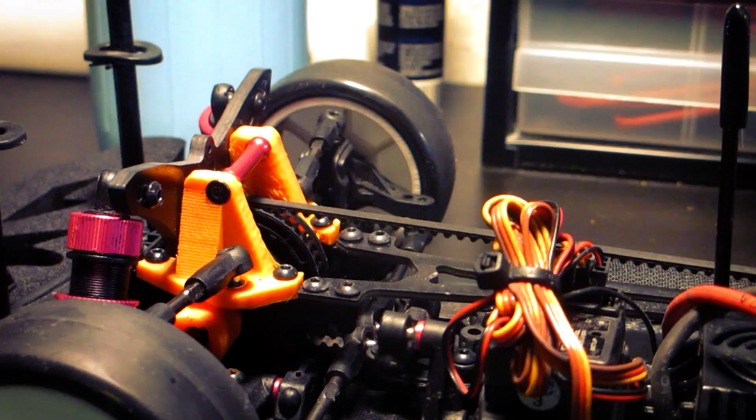I've been using 3D printed spare parts on my on-road sedans for a while now, so I know how they should be designed to make them work.

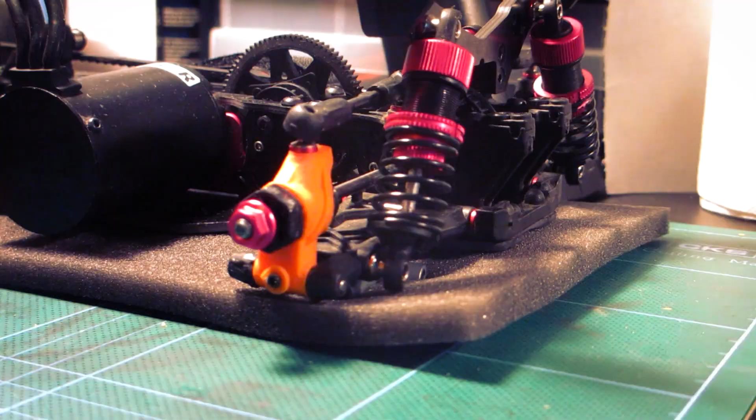I've found that it's very easy to make working parts for the car chassis—parts that don't move very much, like the parts in the steering, suspension arms, things like that. That is easy.

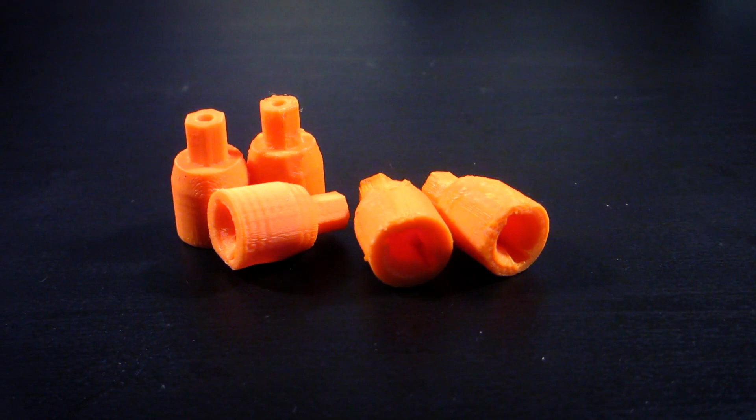The hard part comes when you try to make parts for the car's drivetrain. These parts will be moving very fast, and it really increases the amount of stress put on the part.

While designing these spare parts, I've made a bunch of prototypes, and they really taught me what to look out for when designing these parts.

The orientation you decide to print your part in plays the biggest role in the strength of your RC spare part. That's because the adhesion between the layers is the weakest part in a 3D print.

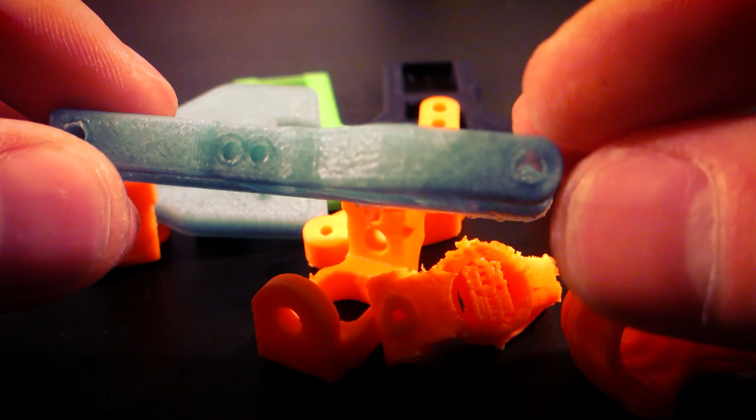This first part has been printed with the layers vertically going down the part, and as you can see, I'm able to break it pretty easily. Keep in mind this has only been printed at around 20% infill.

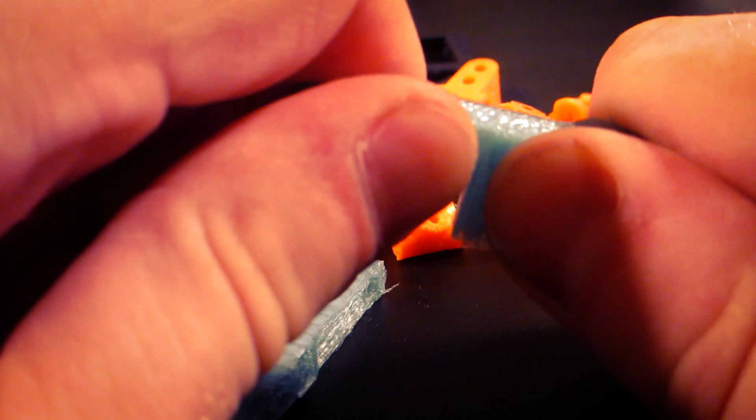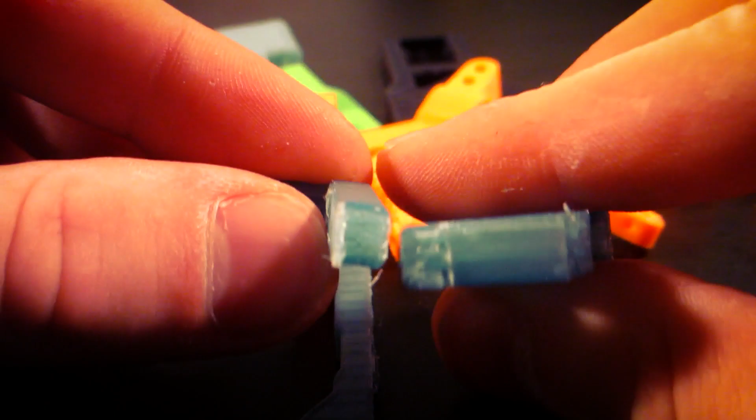The reason this breaks so easily is because the cross section between the layers is very small, decreasing the layer adhesion. This next prototype has been printed laying flat.

This has increased the total layer adhesion by a lot and made the part much tougher. I'm still able to break it, but it was much harder to do.

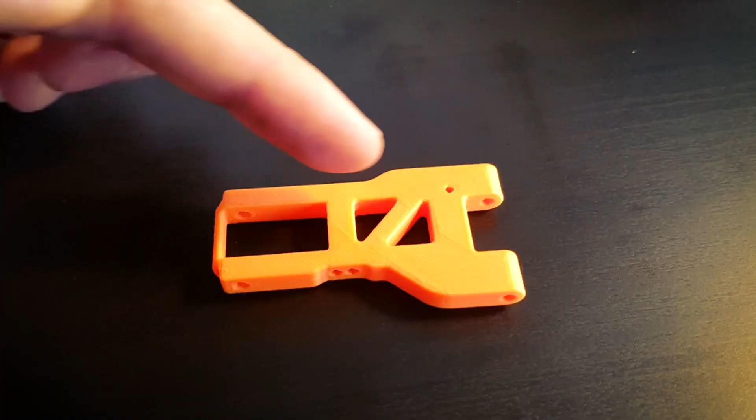This part has been printed laying flat, meaning it's super strong in two directions, and that's exactly what you want from this part. Although there is one issue.

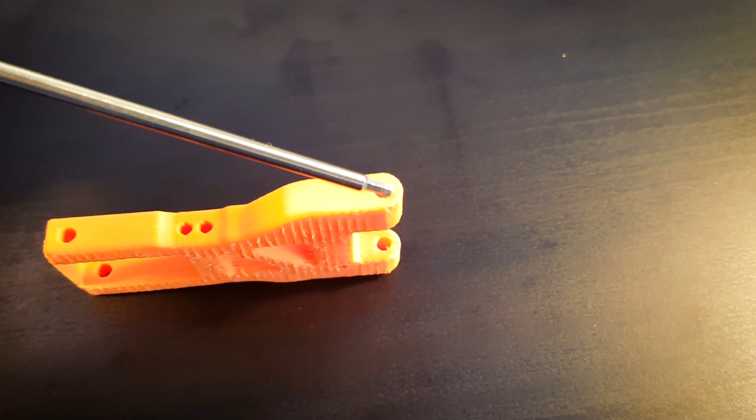Because it was printed laying flat, the holes near the end are suffering. The side walls are only held together by the layer adhesion, which isn't very strong.

The solution is to print the part at an angle. That way you increase the strength near the hole at the end by compromising the strength in other areas.

This will work because before, the part was really overkill in one direction, but very weak in other directions. This way we even out the strength.

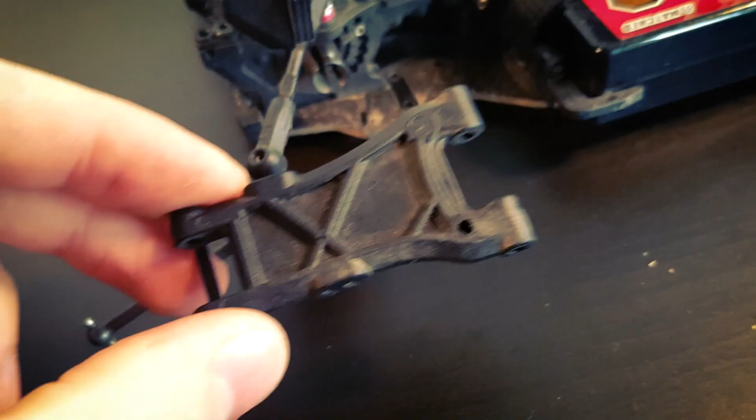Now it's time to start designing our own parts. I pulled off the rear suspension arm from my on-road sedan, and this is the part we'll be designing and printing today. Start off by using a caliper to gather all the critical measurements.

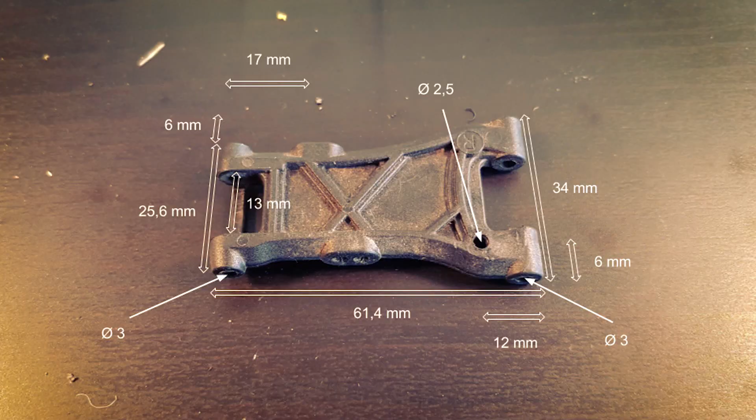These measurements will be my guidelines when I go into Fusion 360 to model this part. I start by sketching a rectangle with the outer dimensions, then I use lines to cut into that rectangle, shaping the part.

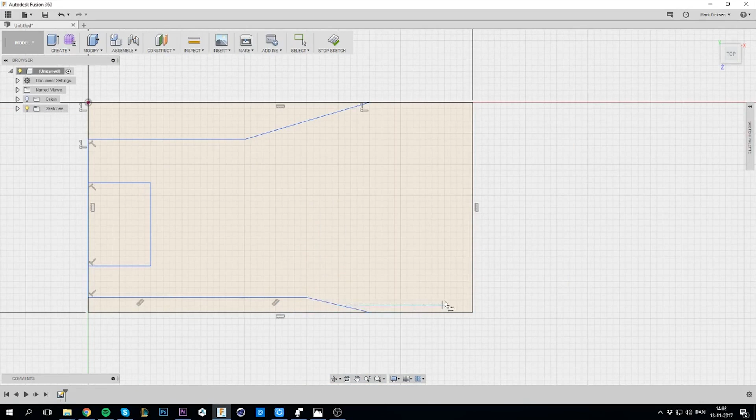I can now extrude the part upwards, giving it thickness. I then create another sketch from the side that I use to cut out the front profile.

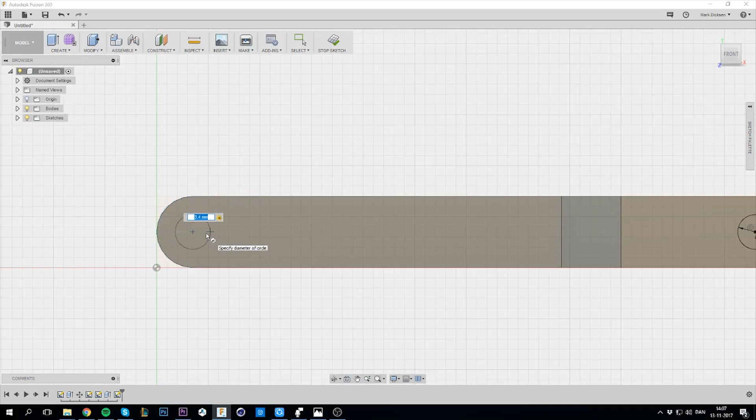I'm now cutting out the holes, intentionally over-dimensioning them by about 0.4 millimeters because I know my printer will print the holes about 0.4 millimeters smaller. Now a bit of chamfer to make it the best.

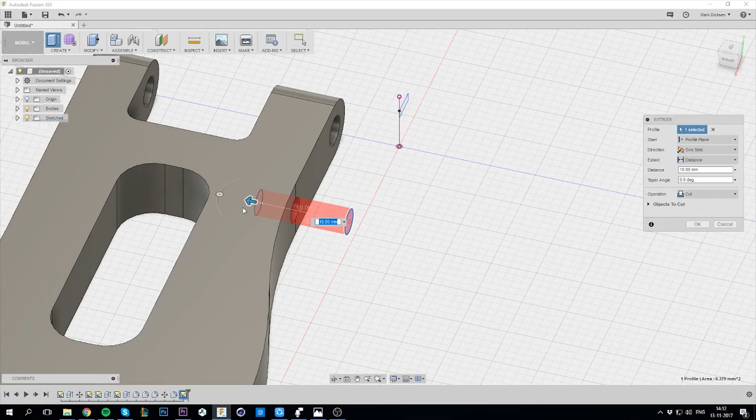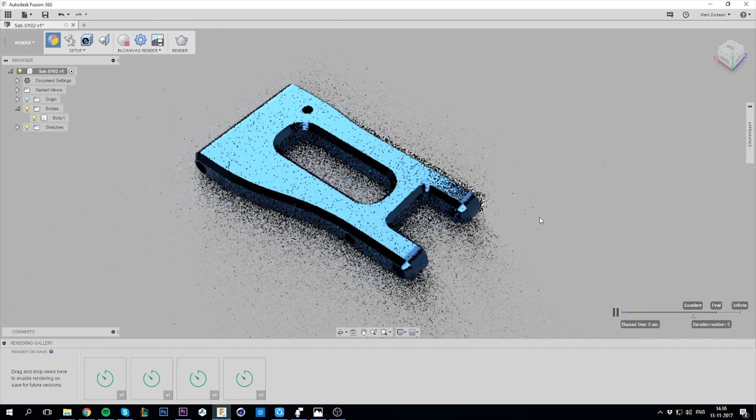This is what the final part looks like, and it's now ready to be printed. I'll now import the STL model into Repetier Host.

I put the model at an angle to increase the strength around the holes. I then slice it using a 0.2mm layer height.

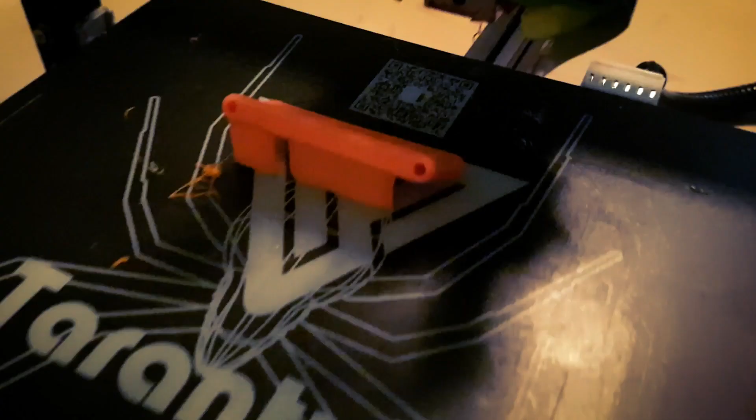Here you see the suspension arm right off the printer, and after a bit of cleanup, this is what it looked like.

The quality of the print was absolutely perfect, and it is extremely robust. There's no way this is going to break, and this was even printed in PLA. If you print it in ABS, it will be much tougher because it won't snap like PLA does.

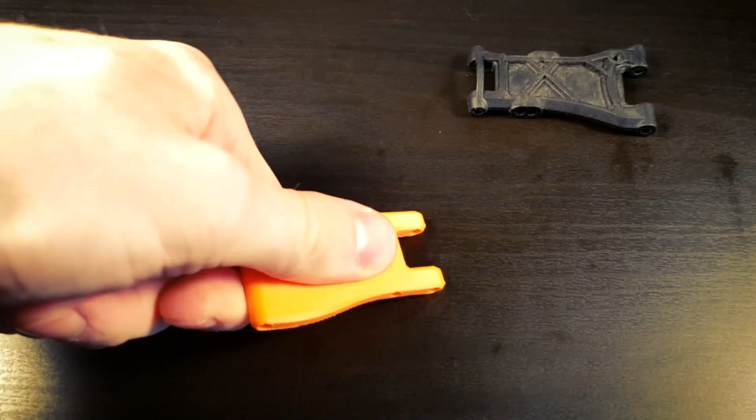Here I'm trying my absolute best to break the part, but it's just holding up.

I was able to mount the part on the car without having to do any trimming at all. It just fit perfectly, and this is going to work great as a replacement for the original part.

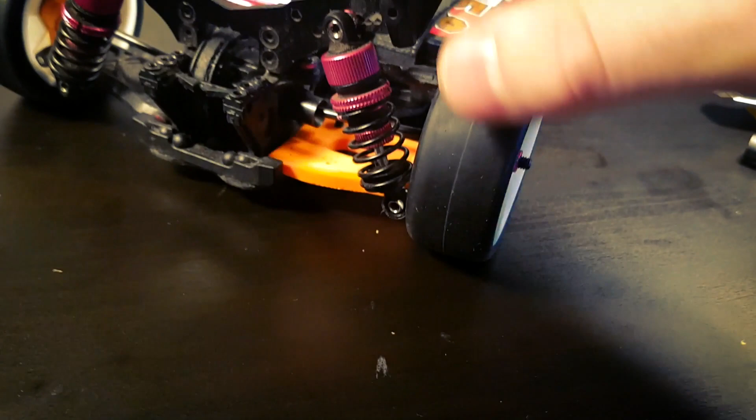It may not be 100% as strong as the original, but since these replacement parts only cost around a few cents, I would much rather use these than buy expensive replacement parts.